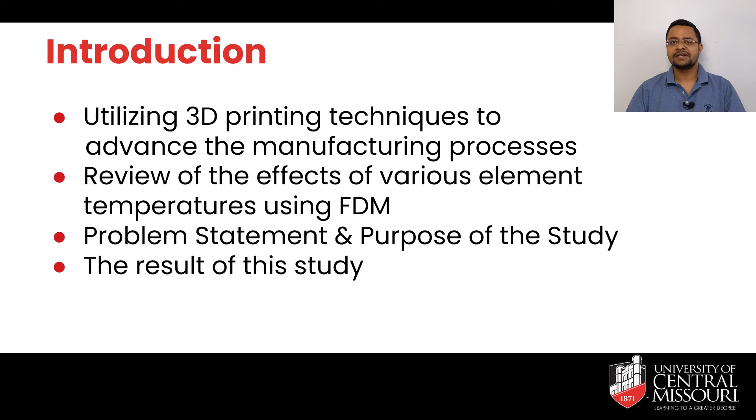The bed temperature is nothing but the temperature of the bed that is maintained while beginning the 3D printing process. The nozzle temperature is the temperature of the nozzle that is maintained for the uniform flow of the filament to form the layers. And lastly, the atmospheric temperature. This is the temperature that is measured in the surrounding of the 3D printer. The results of this study will change the lifestyle of people in many ways.

So, what is 3D printing? Basically, we have four types of manufacturing techniques in manufacturing industry, which are subtractive manufacturing, forming, casting, and additive manufacturing. Subtractive manufacturing, also known as conventional manufacturing, is where we cut down the extra part from the base body to get the final finished products. For example, woodworking, lathe machining. Forming is where we apply pressure to change the shape of the base body to get the final finished product. For example, pottery, sheet metal working.

Casting is where we make a cast die of the shape we want and then we pour molten metal or plastic to get the final product. For example, foundry, automobile components like engine head. Then comes the additive manufacturing, where the product is manufactured by adding material to the base body, for example, 3D printing. So, 3D printing is one of the additive manufacturing techniques that manufactures the product by adding layers one over the other along the cross section. So, the product is printed as a result of hundreds of layers stacked together. The material can be plastic, rubber, ceramic, or metal.

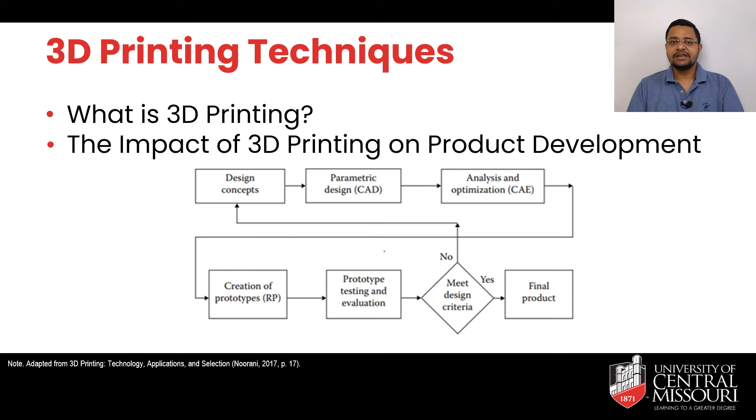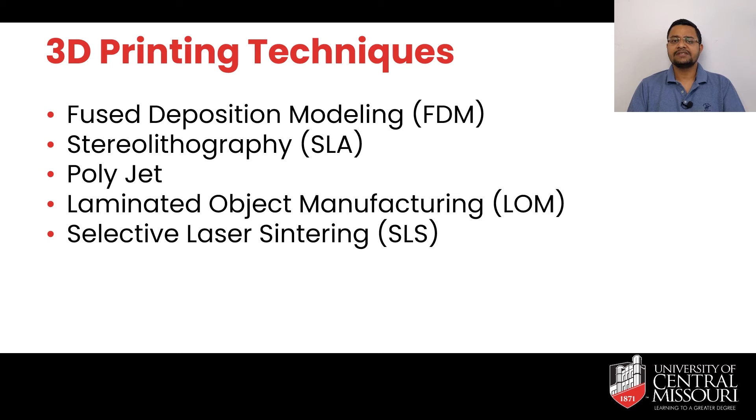Now let's talk about types of 3D printing techniques. There are mainly 5 types of 3D printing techniques currently popular in the manufacturing industry. The techniques are fused deposition modeling, also known as FDM, stereolithography, also known as SLA, PolyJet, laminated object manufacturing, also known as LOM, and selective laser sintering, also known as SLS. As we saw, there are several methods of 3D printing, but the most widely used is the process known as fused deposition modeling, FDM.

FDM printers use thermoplastic filament, which is heated to the melting point and then extruded layer by layer to create the three-dimensional object. This technique was developed by Scott Crump in 1988. It mainly works on the additive principle, as I mentioned earlier. To perform the operation smoothly, various hardware should function simultaneously: the movement of the axis, the cold end filament, the hot end and heat bed temperature. The fans should turn on and off simultaneously.

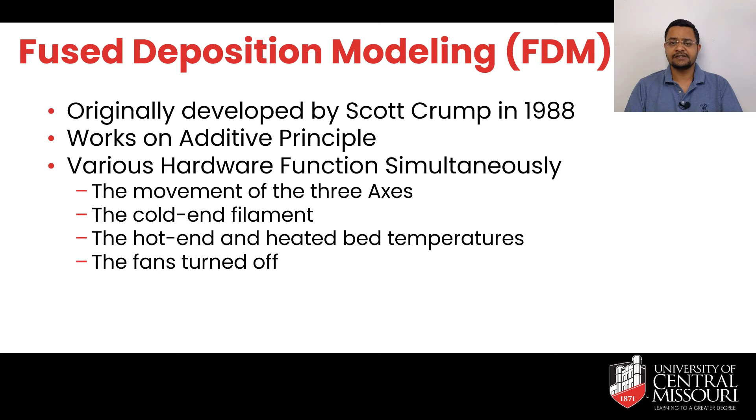The common types of materials used in 3D printing are ABS, PLA, PC and PA. The common defects of 3D printing are detachment, surface error, missing material flow, and shrinkage error. The popular applications of 3D printing are education, prototyping and manufacturing, medicine, construction and jewelry.

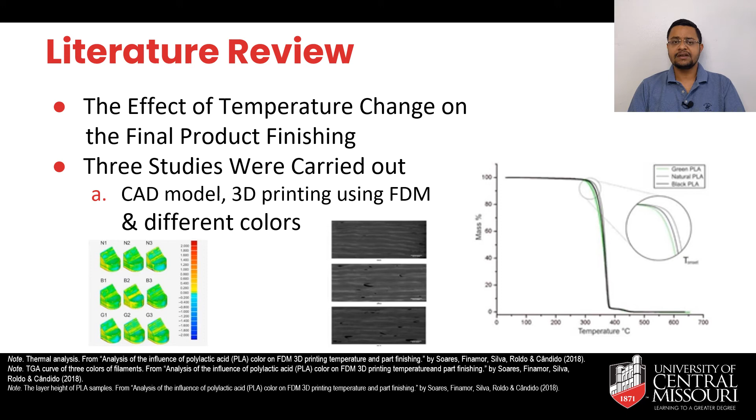For this research paper, we did a literature review of 3 research studies. The first study was the study of the impact of colors of filament on the final product. The author performed the experiments using 3 filament colors: green, natural and black, with the same process conditions. Once the products were printed, they were scanned using 3D scanners. The figures shown in the result are of thermal analysis. Then the next one is the TGA curve plotted according to the readings recorded, and the height of the layers was observed under a microscope.

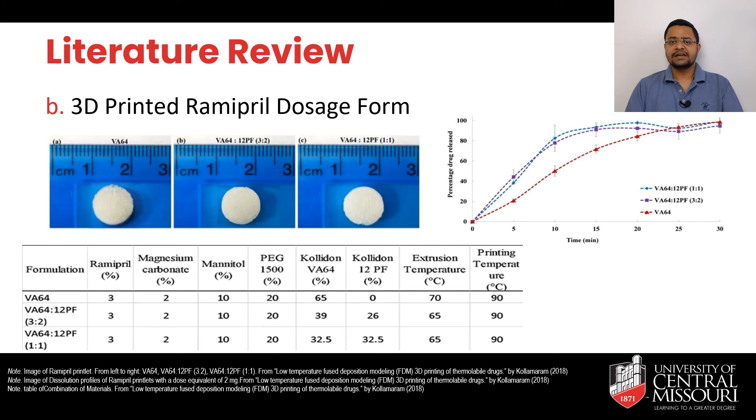Then the next study was about a 3D printed Ramipril dosage form. These were the tablets 3D printed with different combinations of composition as shown in the table. For this process, the temperature was maintained constant at 90 degrees Celsius. Then the DSC and TGA tests were conducted and the results are plotted on the graph. And the curves demonstrate the characteristics of temperature.

For the third study, the author used 2 different semi-crystalline grades of PLA as a matrix: PLA 4032D and PLA 2003D. The table shows the properties of both grades of PLA. To print the dog bone specimen, as we see in the figure, PLA and PLA nanoclay filament were used. Then the TGA test was conducted and the results are shown in the picture.

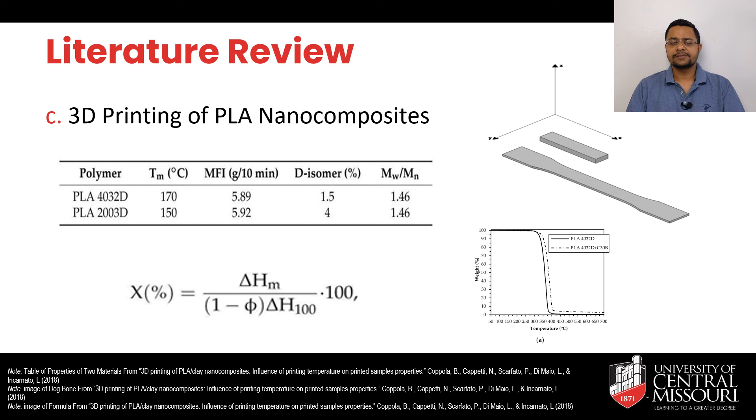So this brings us to our conclusion part. From the literature review, it is clear that even a minor change in temperature can affect the quality of the product. So my research study is to visit different parts of the world to conduct FDM printing experiments subject to different process conditions and create a standard chart to follow with respect to the locations in the world.

Since FDM 3D printing is an easy technique, people are adopting it as a hobby. In the near future, it will become one of the important appliances in houses, just like our refrigerators, washers and dryers at home. This research can help such people around the world to better understand the temperatures to be maintained to get the best quality of 3D printed products.

This also means that in the future, when 3D printers become a common thing, we can have a business wherein we just sell the CAD designs in the form of soft copies through mail to customers and guide them with the temperatures to be maintained so that they can 3D print the products by themselves at home.

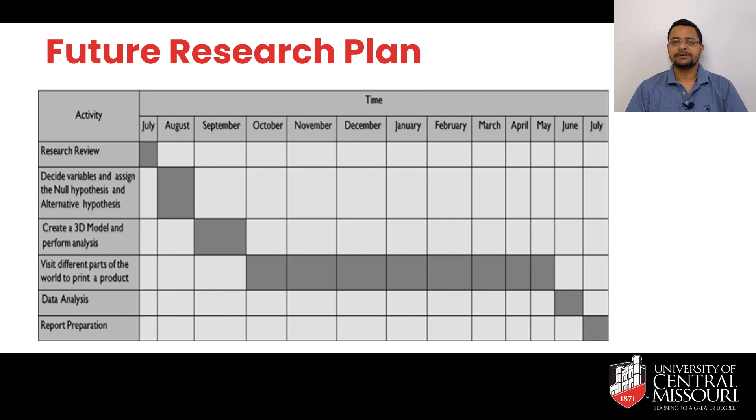So, our study is still in progress and we have a scheduled future plan which can be seen in the picture. Next, the references of the resources we have used for studying this research. So this concludes our presentation.